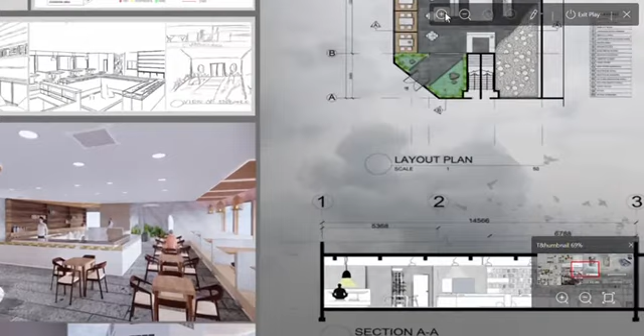Firstly, I would like to briefly explain my introduction towards the final year project, which is the project brief. The main reason of the project is to understand the flow of combining a bakery and a library. This will create its own character and uniqueness that other bakeries don't have.

The research gathered is to make sure the flow is smooth and will meet the needs of the clients and the workers of the bakery. The main reason is to create a new way of combining a library and a bakery. You don't usually see a lot of retails and libraries combined in Malaysia. Even the retails and libraries that are combined are usually cafes, and they are usually located only in Selangor, such as the Ink Library and Buku Cafe.

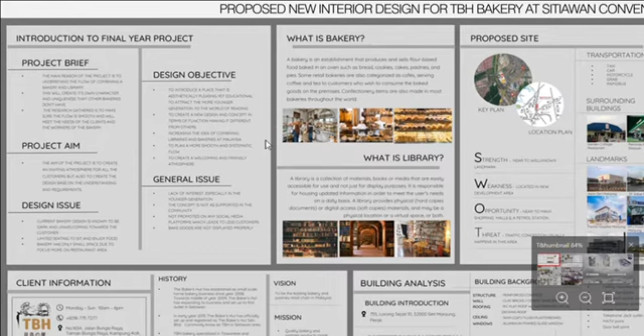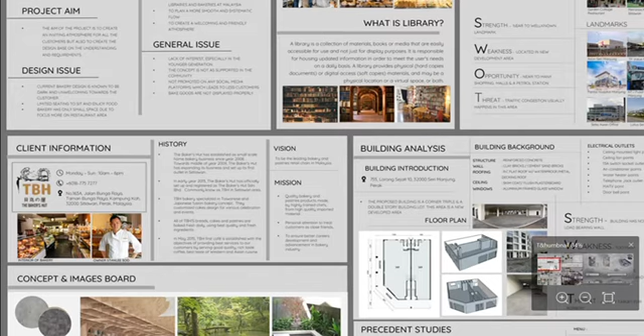As for the smooth flow, this is because the previous TBH Bakery has a small and narrow path and bad traffic circulation, since the workers use the same path, and you cannot see a lot of the display provided.

Next is what is a bakery and what is a library. A bakery is an establishment that produces and sells flour-based food baked in ovens, such as bread, cookies, pastries and pies. Bakeries are usually misunderstood for cafes because they have similar characteristics, but they are different because bakeries sell more of the baked goods and less of the beverages. They only sell 5 to 10 beverages.

What is a library? A library is a collection of material, books, or media that are easily accessible for use, and not just for display purposes. Libraries are usually mistaken for bookstores, such as Popular Bookstore. In libraries, you can only read and cannot buy them. You can only read and borrow them using the library card provided, and the books are usually donated by people who are not using them anymore.

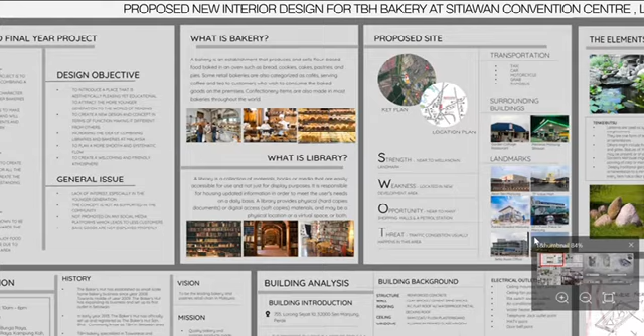The client I've chosen is TBH Bakery, which means the Baker's Hut. It opens Monday to Sunday, 10 AM to 6 PM, and the main office is located at number 163A Jalan Bunga Raya, Taman Bunga Raya, Kampung Koh, 32000, Sitiawan, Perak, Malaysia. The Baker's Hut has been established as a small-scale home bakery business since year 2008.

Towards the middle of year 2009, the Baker's Hut expanded its business and set up its first outlet in Sitiawan. The second outlet is located in Manjung Point, and the third outlet is located in the Aeon vicinity. The third outlet actually has a combination of a restaurant with it.

The vision is to be the leading bakery and pastries retail chain in Malaysia. The mission is quality bakery and pastry products made by highly trained chefs from high quality imported materials, personal attention to treat customers as close friends, and to ensure better career development and advancement in the bakery industry.

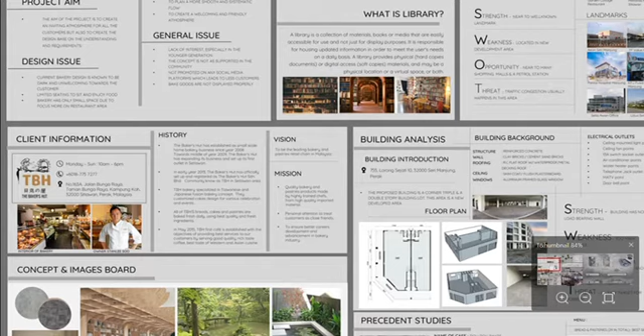Next is the proposed site. The site given is Sitiawan Convention Centre, Lorong Sejati 10, 32200, Seri Manjung, Perak. Here is the key plan and location plan. The strength is it is near well-known landmarks, but the famous ones are Aeon Seri Manjung, Lotus Seri Manjung, and Petronas Manjung, Sitiawan.

The weakness is that it is located in a new development area. There are not many shop lots there, only houses located here. The opportunity is that it is near many shopping malls and petrol stations. The petrol station is located right across the road. As you can see here, these are all the shops available.

The threat is traffic congestion usually happens in this area. There are a lot of traffic jams there because people go to work and go back from work using the road.

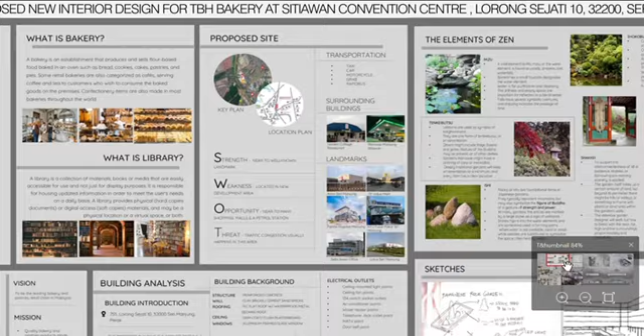Building analysis. The building is located in Sejati and it is a 2-shop lot building. It is a triple storey and double storey building lot. The strength is the building has no load-bearing walls.

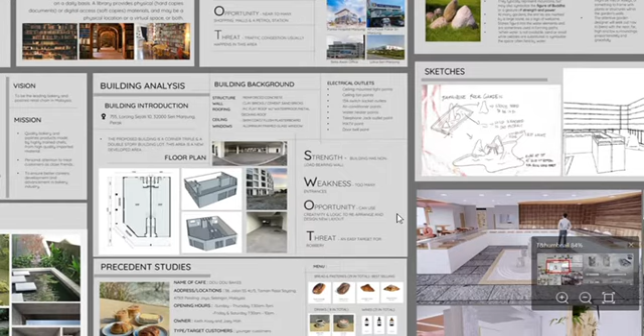The weakness is too many entrances—there are 5 entrances at the front and 2 entrances at the back. The opportunity is it can use creativity and logic to rearrange and design new layouts, such as my layout. The threat is it is an easy target for robbery because it's a new development area.

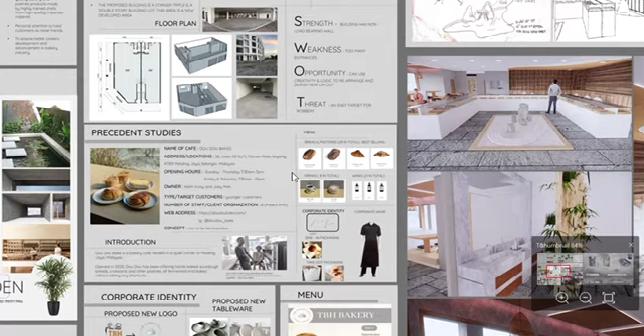Next is the precedent study, which is the case study. The case study I've chosen to highlight is Dou Dou Bakes because it has a similar concept to mine, which is not to be too luxurious. You can access its website at dudubakes.com.my or IG at dudu_bakes.

Dou Dou Bakes is a bakery cafe nestled in a quiet corner of Petaling Jaya. Opened in 2020, Dou Dou has been offering home-baked sourdough breads, croissants and other pastries, all fermented and baked without taking any shortcuts.

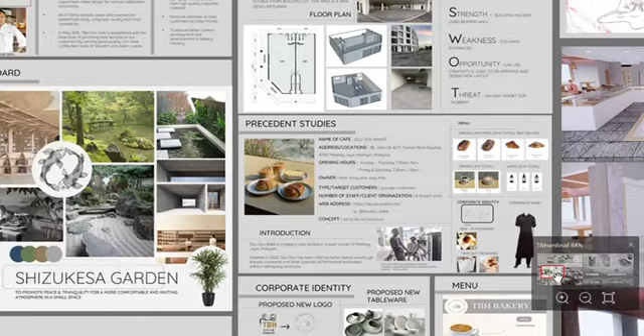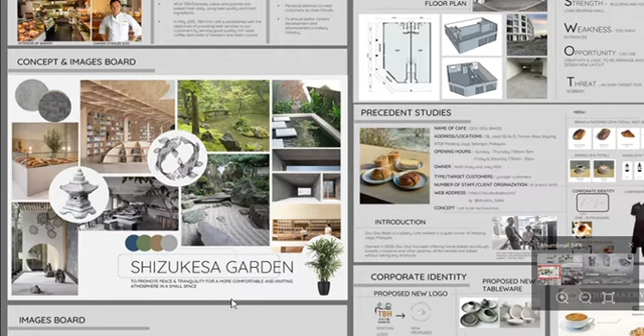Next is the concept. The concept I've chosen is Shizukesa Garden, which means Tranquility Garden, and it means to promote peace and tranquility for a more comfortable and inviting atmosphere in a small space.

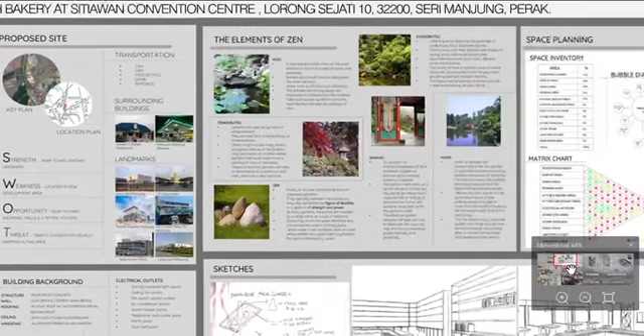The inspiration I've gotten is from the Japanese rock garden, and as you can see here, these are the elements of Zen that I've chosen because the Japanese rock garden originated from Zen.

The elements are Mizu, Tenkebutsu, Ishi, Shokubutsu, Shakkei and Hashi. The brief explanation of them: Mizu is a vital water element, Tenkebutsu is an ornament, Ishi is rocks and is a figure of Buddha, Shokubutsu is more to nature such as maple trees, and Shakkei is more to existing architecture and existing nature. Hashi represents bridges and symbolizes a person's journey.

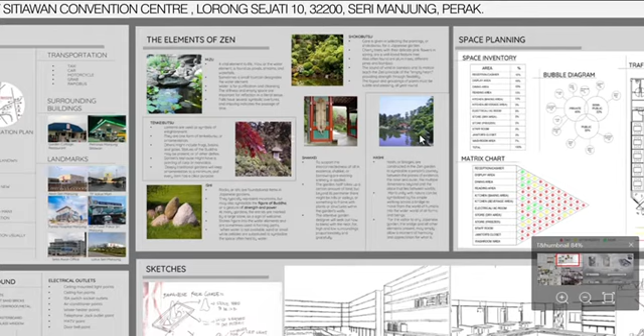Next is my corporate identity. As you can see here, I have proposed a new logo which is more clean cut, because the existing logo for me was too childish and did not go with the concept.

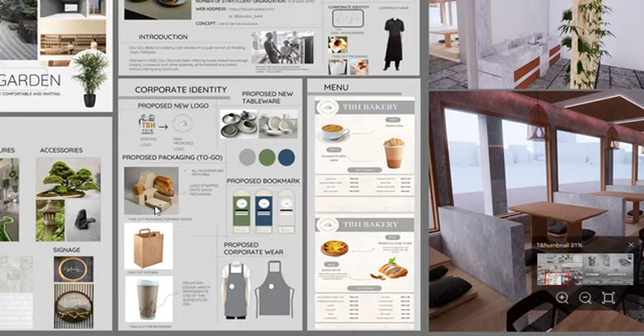The proposed packaging is all recyclable and biodegradable. As you can see here, they're all made of cardboard and the logo is stamped on rather than stickers. And the paper bag logo is stamped on too, which is recyclable too.

The take-out beverages have mountain scenery as a symbolism of Zen. The proposed new tableware is very clean cut and following the color scheme.

The proposed bookmark and book card, which you can actually use to borrow books, follows the color schemes and has information of our Instagram and website on the bottom.

Our proposed corporate wear is a clean cut grey to create a natural and clean look. The menu is in the color grey, as you can see here.

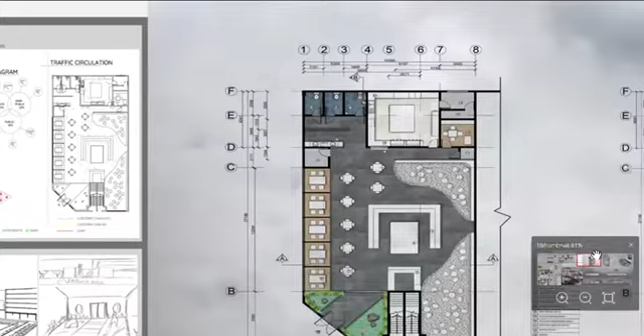Next, moving on to my layout and reflected ceiling plan. As you can see here, my layout plan is a centralized traffic circulation, which I got the inspiration from the Japanese Zen garden itself, because the rock, which is the Ishi, the element of Zen, is usually at the center of the sand.

And the sand outlines the rock as the center. Other elements in the Zen are located in this floor plan, such as the Mizu, which is the water element, Shokubutsu, which is the plants element, Tenkebutsu, which is the ornaments, are located here too, and Hashi, which is a symbolism of bridge here.

And Shakkei, which is a symbolism of nature itself, which I use concrete walls as a symbolism of nature. As you can see, there are 3 restrooms here: the women's restroom, men's restroom, and the OKU restroom or disabled restroom. And here is the semi-public dining area, which is in a Japanese seating version.

And over at your right side is the reading area here, which is a symbolism of Zen too. The rocks and pebbles are a symbolism of sand, and the furniture is symbolism of the stone in the Japanese rock garden.

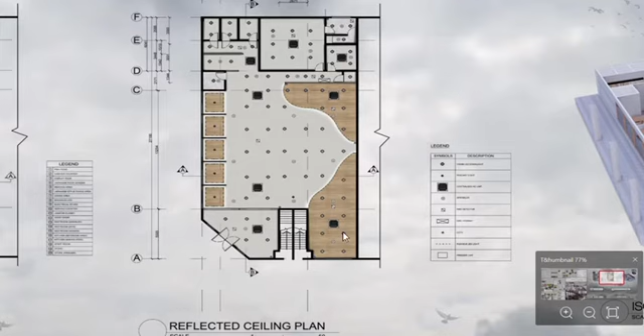And moving on to the reflected ceiling plan, it is all the same finishes except for 3 places, which is the storeroom, made all of cement with just polished finishes, and here is the timber ceiling with LED lights as a highlight of the semi-public areas, which is the reading area and the Japanese seating area. And here is the isometric view of the layout plan.

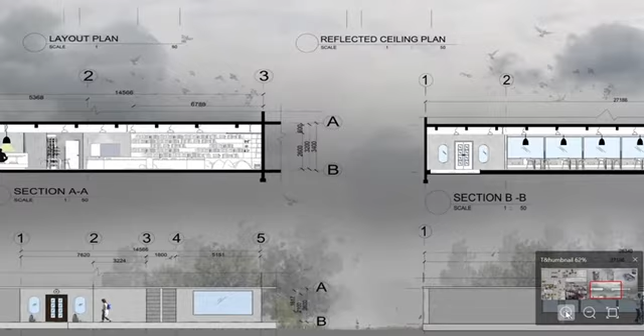And here are the section A and B and the facade and side elevation. The walls are very simple because I focus more onto the floors to create a more longer illusion.